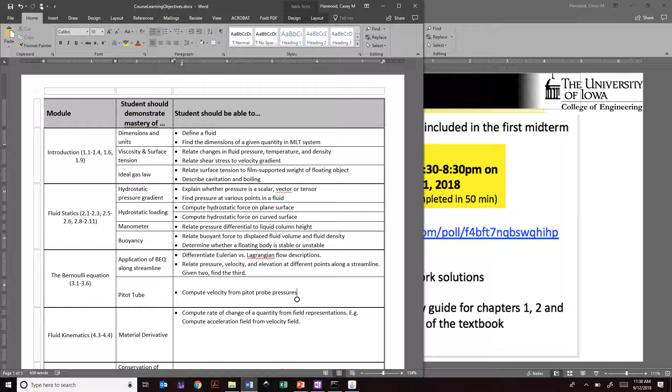Okay. It's going to cover chapters 1, 2, 3. So for study guides, I recommend looking back on Icon and finding this course learning objectives sheet, making sure you're up on all of these tasks for modules 1, 2, and 3. You can do these things. Additionally, after class today, I'll be posting a practice exam. It was the exam I used last year. You guys will have that for the next week.

Sometime next week, Tuesday, Wednesday, or Thursday, I'm going to hold an evening review session. The idea is it's very much student-led in that you guys bring questions that you have about the practice exam, homework problems, etc., and I'll just work those problems on the board for about 2 hours. Okay, so it's going to be Q&A driven. If you guys don't bring questions, I'll pack up and leave early. So that's going to be the format.

The schedule for that hasn't been set precisely because I want it to be what suits the majority. I know we're getting into midterm season here, so I want to avoid conflicts if possible. So I posted it on Icon already. If you go to Icon modules, exam 1 supplement or prep material or something, there's a link to indicate your availability. And sometime tomorrow afternoon, evening, about 24 hours from now, I'll go ahead and request the room so that we have a space to meet.

In terms of materials you can bring with you, shown here, an organized binder with homework solutions, quiz solutions if you have them, which are the same as the homework solutions, right? You can bring a handwritten summary sheet with formulas. This is one sheet, front and back, okay, that has formulas for chapters 1, 2, and 3, and a calculator.

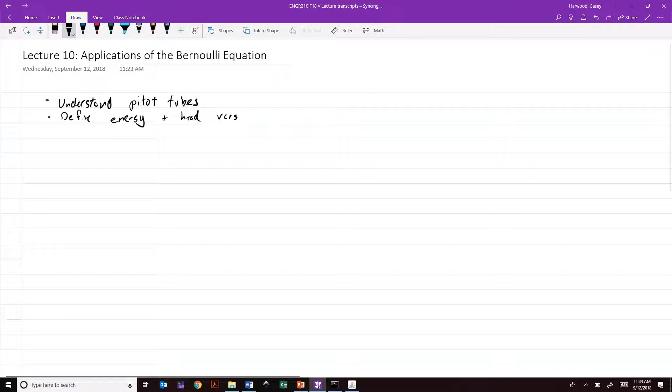All right, so today we're going to be wrapping up our discussion of the Bernoulli equation. The last lecture ran a little bit longer than I expected. We didn't quite get to all of the objectives that I had, so we're going to try to hit those today. So our specific goals for today are: we want to understand the function of a Pitot tube. We want to define the energy and head versions of the Bernoulli equation. And finally, we want to use the continuity equation and the Bernoulli equation together.

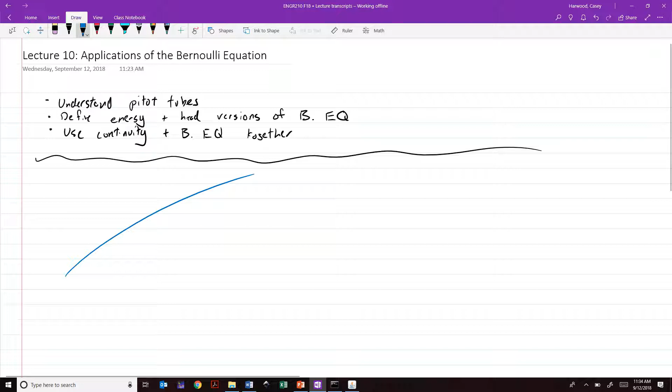So to anchor ourselves and understand where we are right now, right? So far in chapter 3, we've really come up with two equations. Those were F equals ma, manipulated a little bit, but applied in different ways. So we said we've got a series of streamlines, and on each streamline we have a local coordinate system. Let's point these the right direction.

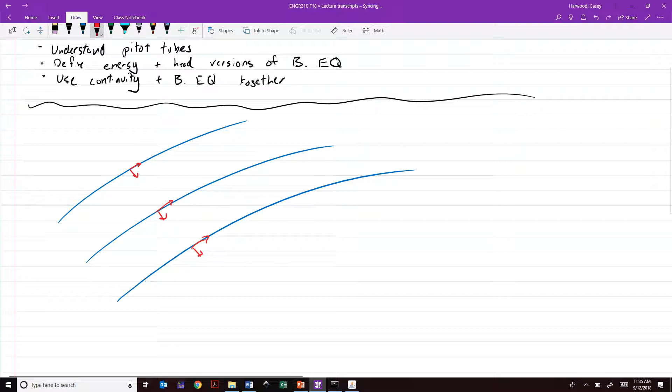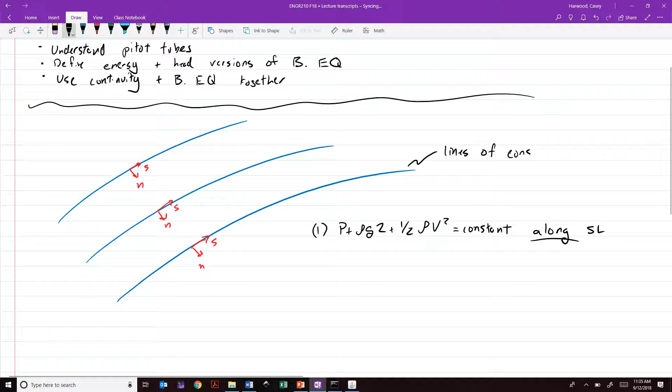And we've derived our two equations. The first is P plus rho g z plus 1/2 rho V squared is equal to a constant along these streamlines. Okay, so each of these blue lines here can be thought of as lines of constant equation 1.

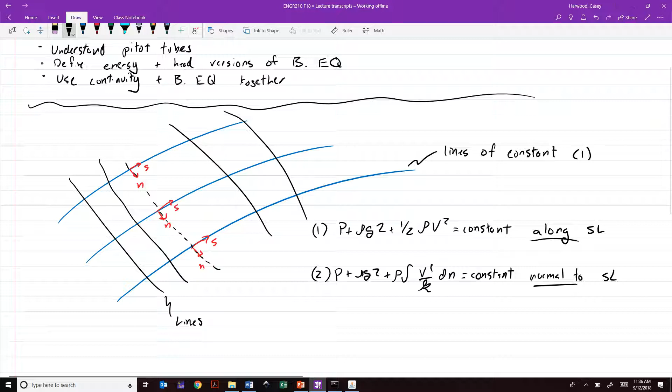Then we had our second equation, which was P plus rho g z plus rho times the integral of V squared over the radius of curvature is constant normal to streamlines. And so this means if we took lines that passed through this normal vector and through each of our streamlines, we could draw sort of a network of lines that looked like this. Okay, and so these would be lines of constant equation 2.

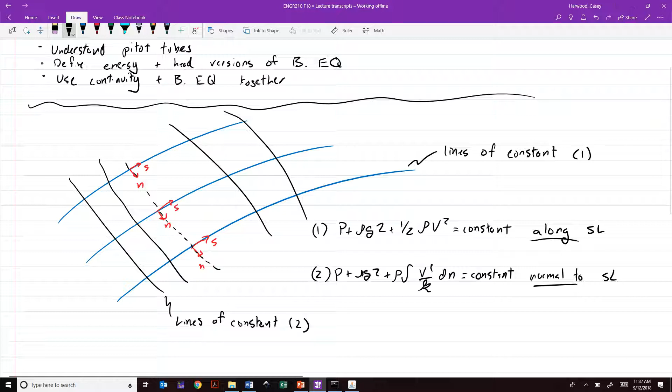So the streamlines and the lines that are perpendicular to them will form this sort of a curvilinear grid, or this sort of net, where at every intersection the two should form a right angle. All right. And so these two equations apply depending on whether we're looking directly across streamlines or along them. But we have to keep in mind what I stated before were sort of our commandments, if you will, of Bernoulli, or the limitations that are inviolable,

which are: both of them apply to steady flow. Both of them require that we're assuming our flow is inviscid, that is, it's not dominated by viscosity. In both cases, we're assuming a constant density, and then the equation has to be applied along a streamline if we're dealing with equation 1, or perpendicular to streamlines if we're dealing with equation 2. So before you apply either of these equations, you have to go through this checklist and make sure that all of those assumptions are at least acceptable. Okay.

Now, the rest of what we're doing today is basically demonstrating through example some of the applications that we haven't really gotten to yet. And the first one is this idea of, it's called a Pitot tube.

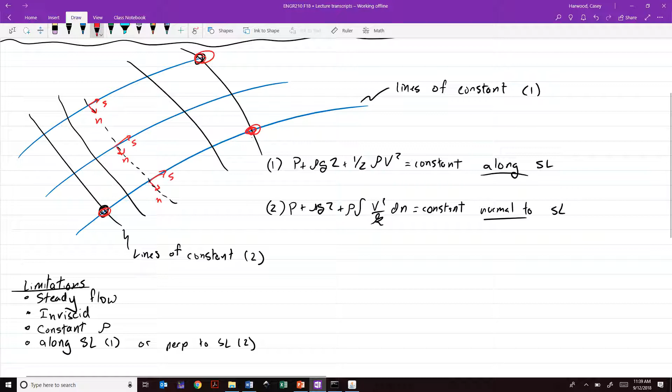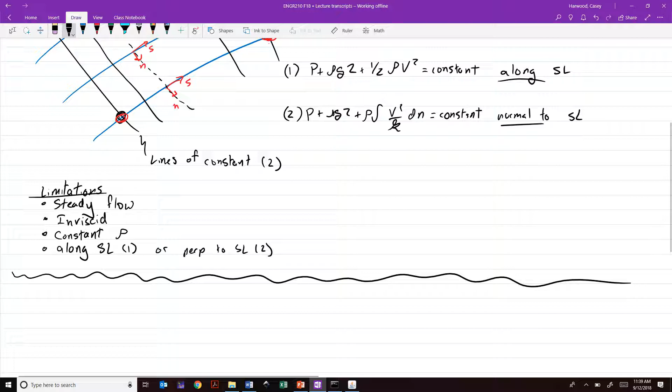Okay. So the Pitot probe, or the Pitot tube, is one of the most widespread instruments that we see out in engineering fields. Any of you ever been stepping onto an airplane, and if you've looked over at the cockpit, you'll see this little thing sticking out of the side of the fuselage that has a right angle, about 2 inches wide. Anyone ever seen one of those? It usually has a sign that says "Do not step." No. All right. Well, keep an eye out for these. These are what are known as Pitot probes, and they're instruments used to measure the velocity of the flow past them, and they do that using the Bernoulli equation.

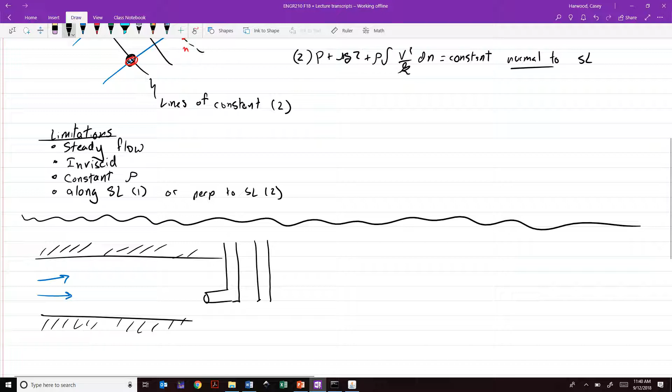So let's consider a case where we have some flow through like a pipe or between two walls where we don't know the velocity and we don't know the pressure of the flow. Okay, so our flow is moving from left to right. We're going to insert two sort of straws or tubes into the flow. The first is going to be at a right angle, and the second one is going to be straight in. And so the flow is going to move past these two tubes, but in one case it's going to hit the end of the tube head on, and in the other, it's going to flow right past the end of the tube.

So our question right now is, if we put our points of interest, say right here, and then right here, let's number these point 0, point 1, and point 2. Okay, using the Bernoulli equation, we should be able to figure out what the pressures are at point 1 and 2 in terms of the pressure at point 0. In other words, at 0 we've got V naught, P naught, and Z naught is the elevation. So using those symbolically, can we write the pressure at point 1 and point 2?

So we'll go ahead and first apply Bernoulli between 0 and 1. This is going to look like P naught plus 1/2 rho V naught squared plus rho G Z naught is equal to P1 plus 1/2 rho V1 squared plus rho G Z1.

All right, initial simplifications we can make. Sort of by inspection, we can see that 0, 1, and 2 are all at the same elevation. That is, Z is the same for all of them. So we could subtract the rho G Z terms from both sides to cancel those out. The second thing is that this tube that's head on to the flow, this right angle tube, is what's known as a stagnation tube. And the idea there is that the flow hits it and it stops. So at point 1, we would say that the velocity is 0.

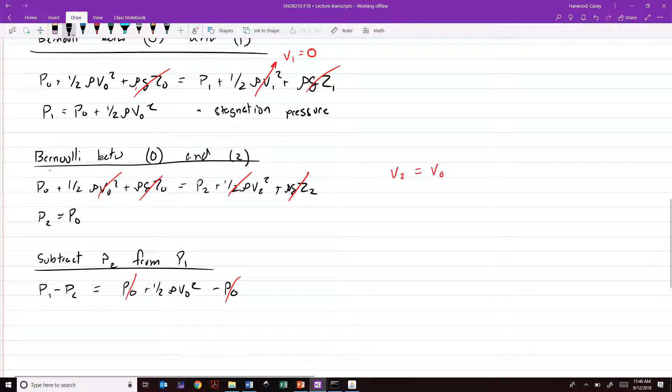we would get P1 minus P2 equals P naught plus 1/2 rho V naught squared minus P naught. So we get that cancellation of P naughts, and now we have a term that only involves the density and the velocity. If we know the density of the fluid, let's say it's fresh water, 1,000 kilograms per meter cubed, or air at standard atmospheric pressure and temperature, 1.23 kilograms per meter cubed, we generally are able to get a pretty good fix on what the density is.

Then we can say that the velocity V naught is equal to the square root of 2 over rho times P1 minus P2.

And the nice thing is there are lots of measurement devices that allow us to measure the relative pressure between 2 points. We talked about one of them in Chapter 2, or well, Professors Mattia and Eichinger did. What about the U-tube manometer? It's a way of measuring the difference in pressure between 2 points based on the height difference in a column of fluid. There are also differential pressure gauges, which will give you a digital readout.

Whatever your measurement device is, if you are able to measure this quantity and you can figure out what your density is, then you can measure the velocity, which is really useful. And so these are typically used as backup devices on aircraft to measure airspeed if GPS drops out or something. The idea there being, right, density is going to change with elevation, but there are pretty good tables that are able to tell us what the density is based on the elevation of an aircraft.

So this is the principle of operation of a Pitot probe. And I want you to remember this, understand it. Right? Come to love the Pitot probe because it's something that's going to show up throughout the course. Any questions about this? All right, let's move on to alternate forms of the Bernoulli equation.

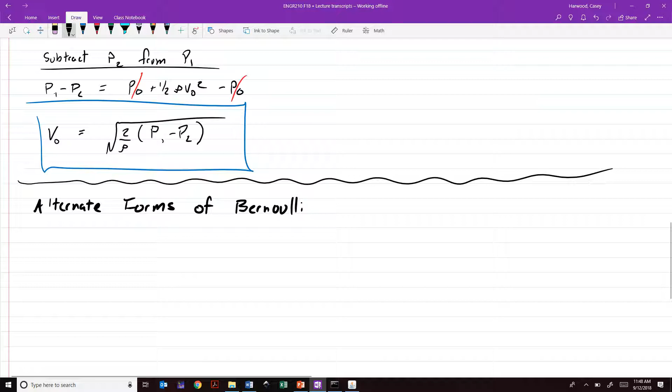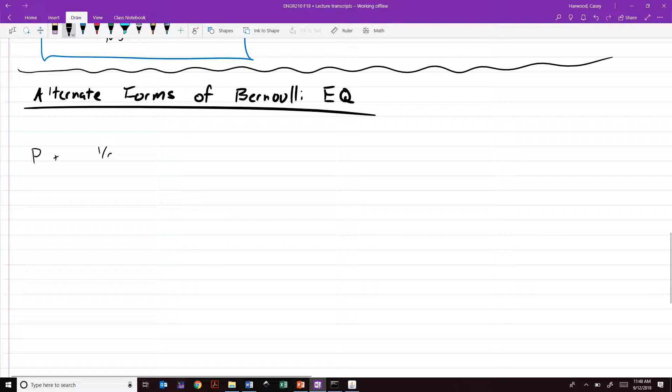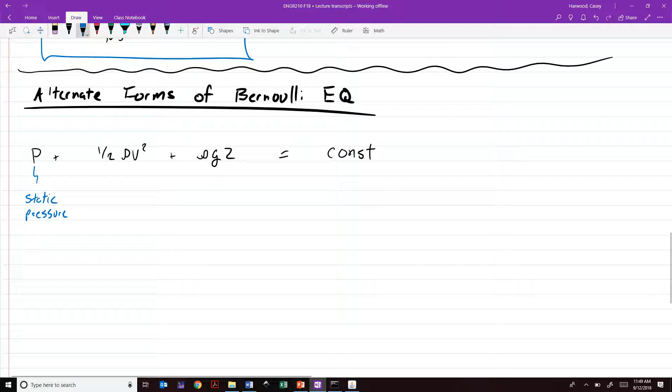So first, I'm going to go ahead and write out the Bernoulli equation that we've already seen. Right? P plus 1/2 rho v squared plus rho g z is equal to a constant. So each of these terms has a special name. And these are things that showed up in the text if you read. But the first term here, P, is what's known as the static pressure. This is what we measured with that second of our tubes in the previous example.

The second term is what's known as the dynamic pressure. And the third term is the hydrostatic pressure. The idea is if you sum these up, you get what's called the total pressure, which should remain constant. Okay, and we saw in the last problem also that if we took these two terms together, we got what was called the stagnation pressure.

Okay, so the thing is that pressure, right? If we were to say pressure is force per unit area, it can also be interpreted as the energy per unit volume. So the static pressure is sort of like the pressure potential energy, or 1/2 rho v squared looks sort of like a kinetic energy term. If we were to multiply it by volume, we would get 1/2 mv squared, which is familiar kinetic energy.

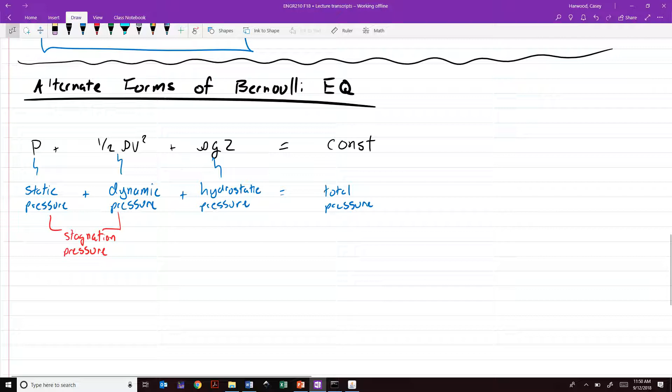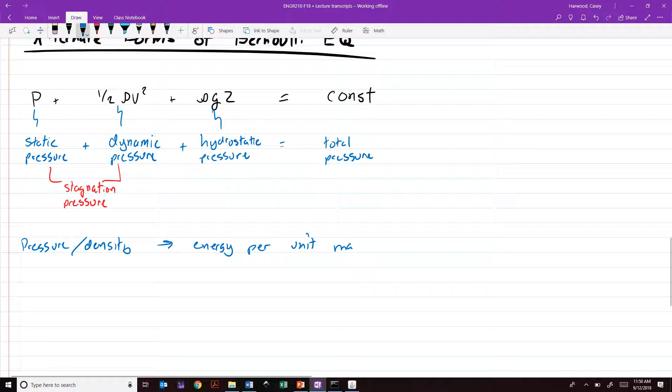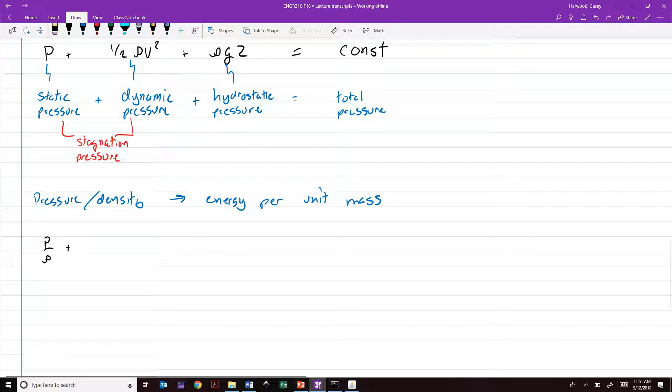And so if we divide this through by rho, the density, we could say that pressure over density can be interpreted as the amount of energy per unit mass. And so if we go through and we divide everything in here by rho, we'll end up with an alternate form. Looks like this: P over rho plus 1/2 v squared plus gz is equal to, again, a constant. It's the same equation, it's just been divided through by a constant, but this is what we would call the energy version of the Bernoulli equation.

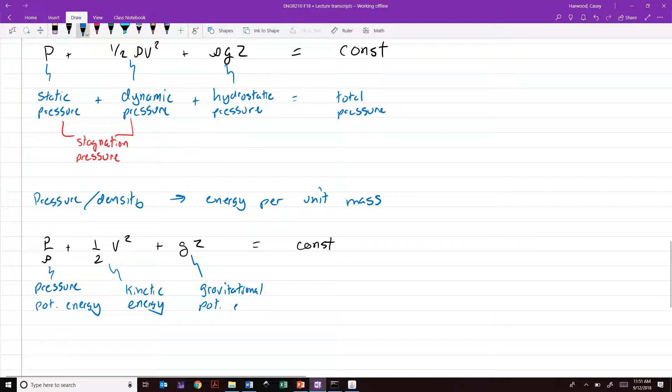And so we have, this first term is the pressure potential energy. The second one is the kinetic energy. And this third one is the gravitational potential energy. Oops. All per unit mass. Okay, so we'll say per unit mass. And if we add these together, we can say then that we have constant total energy.

So this is a way of saying, look, the Bernoulli equation is really a statement of the conservation of energy. And under the assumptions we made, no viscosity, that's sort of the same as saying it's a reversible process or a conservative process. There's no friction. That means that the total energy is conserved in a fluid.

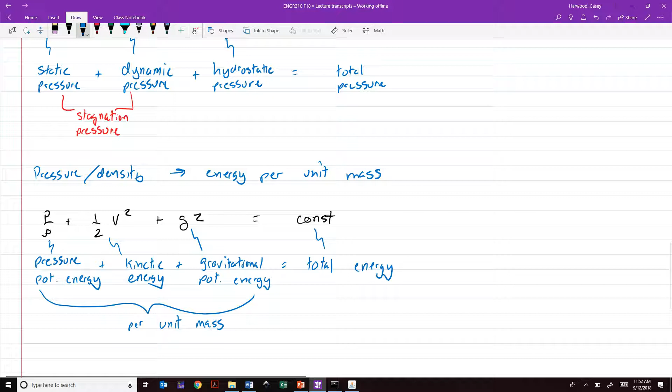Finally, if we were to divide through by g, this second equation, we can see from the second term here that what we're going to be left with is something that has dimensions of length. So if we say P over rho g plus 1/2 v squared over g plus z now is equal to constant, this is what we call the head equation.

And remember, when you discussed manometry, the manometer equation with Prof. Mantilla, you talked about how you can describe the elevation difference of a column of fluid as the head. The idea here is we just give these terms different names. This first one is the pressure head. That is, this is how high the pressure would drive a column of fluid in a piezometric tube.

The second one is what we call the velocity head. And this third one is the elevation head. And these together sum up to the total head.

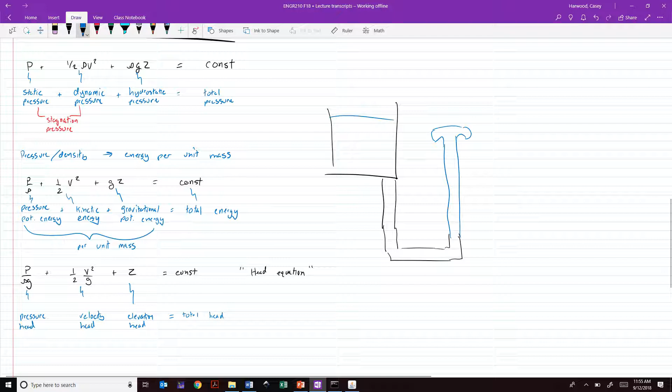And then spraying upward. So you had now a free jet of water coming out the top. So intuitively we could probably recognize that the jet of water is going to reach the same height of the water level in the tank. But to show that mathematically, it would be most convenient, probably, just to avoid extra terms, to use the head equation, right?

Where we could say, if this is the head of our initial tank of water, we could pick points here. If we wanted to, we could pick a point here, and a point here, and we could apply the Bernoulli equation. But if we apply the head equation, we wouldn't have to deal with that. We could apply the head equation between that first and that third red dot there.

We know that we can set the constant of the head equation at point 0, and if we had this one, point 2, we can apply it between point 0 and 2 directly. And we could say, well, the pressure is going to be the same, the velocity in both cases is going to be 0, and so you just solve for z at that point.

So this is something that causes some confusion because students treat them as 3 different equations. I just want you to understand that they're the same equation, just written out in different forms and given a different name. Okay, so sort of along the same lines.

Buster? Yeah. This equation for head, is this what we were supposed to use for the third homework problem that we were doing today? Well, again, you can use any of them, right? There are no situations where you have to use the head equation and you can't solve it using Bernoulli. The only thing it's really going to do is allow you to save some pencil lead, right?

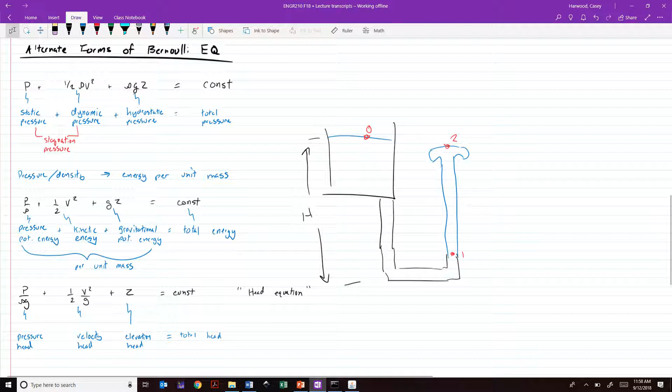Shouldn't the velocity be 0 at the stagnation point? The velocity will be 0 at the stagnation point. So why are we including the dynamic pressure? Because if we go up to our previous example where we had 0 and 1, and the end of our stagnation tube, we said that P1 is equal to the sum of our static pressure at 0 plus a dynamic pressure. So the stagnation pressure is what happens if you bring the velocity to 0, then all of that kinetic energy gets lumped in with the potential energy. Okay.

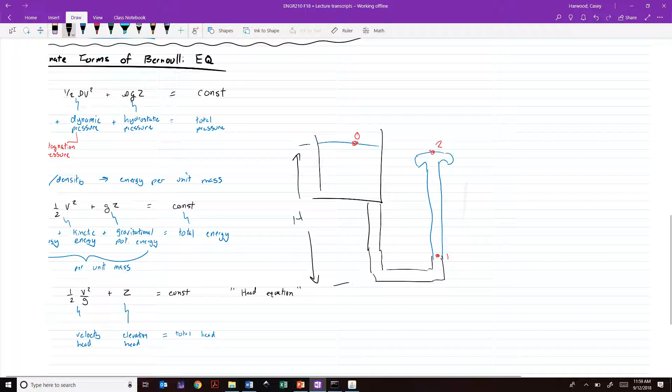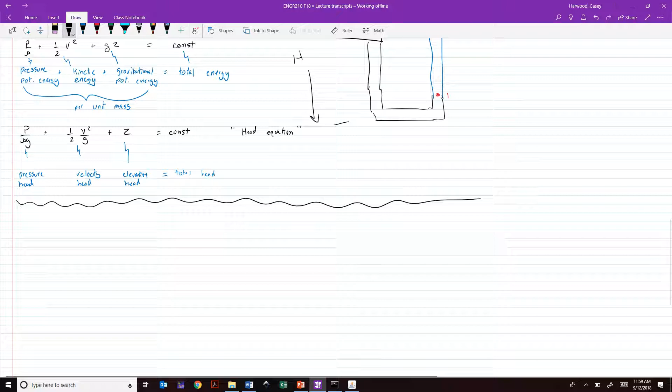So I want to define these things called hydraulic and energy grade lines very briefly. These are more commonly used in civil engineering than in mechanical engineering, but they're useful to know. So.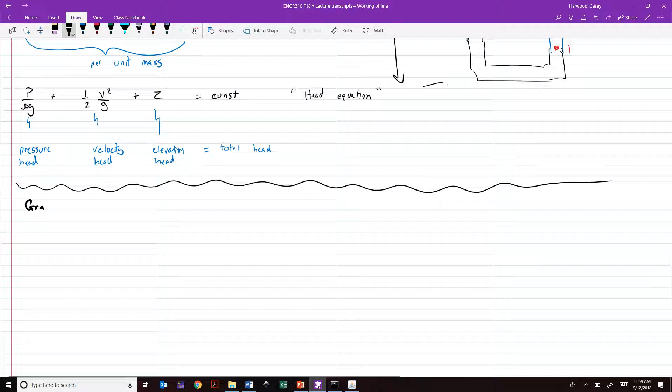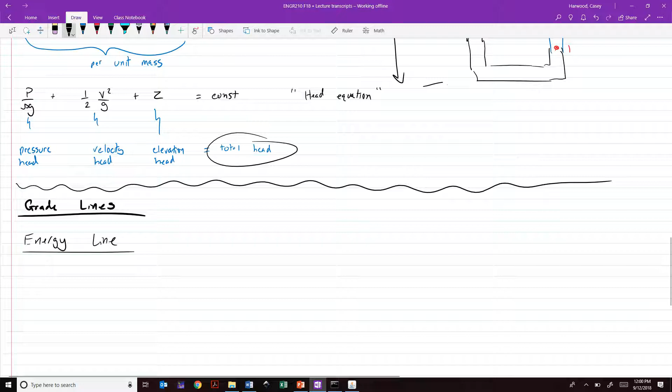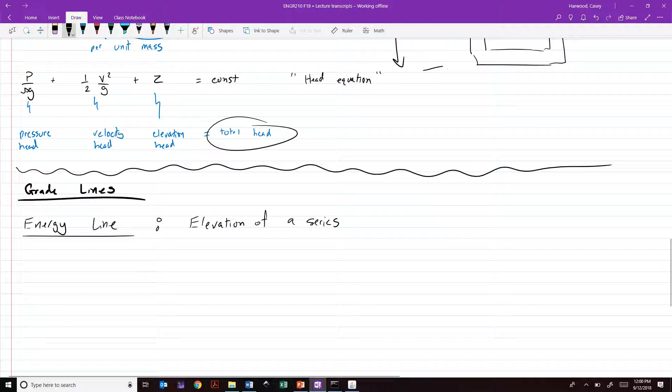So an energy line can be thought of as, if we're looking at our head equation, basically plotting out the total head of a system. So this can be thought of as the elevation of a series of stagnation tubes in a flow. And this is probably a confusing statement. I'll clarify it in a moment.

And the second one, the hydraulic grade line, is the elevation of a series of static pressure tubes in a flow. So in other words, I'm going to scroll back up here for a second. If we were to take this situation again, let me go ahead and copy this and bring it down so that we aren't scrolling a ton. Paste. There we go. Okay, so tube 1, a stagnation tube.

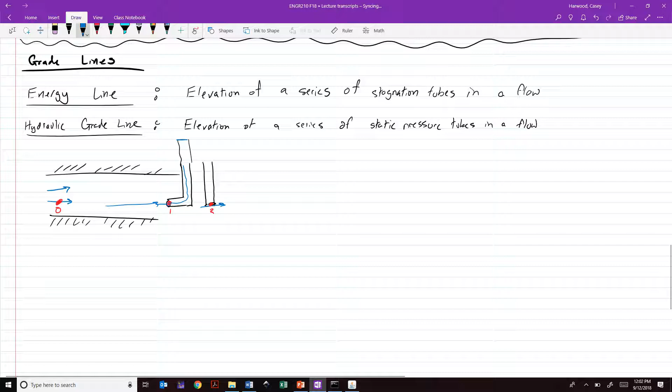If instead of having a pressure probe at the end of it, this were to be full of whatever fluid, as if it were like a straw. We took a straw, bent it 90 degrees, stuck it into a flow. The idea is that the fluid that is flowing past is going to occupy the tube and fill it up to some height. Now, the height of that fluid in the tube is going to be the pressure head plus the velocity head plus the elevation head. And so that's going to be indicative of the total head in the system, and so that is going to be the energy line at this point in a system.

Whereas the hydraulic grade line would be if we were to allow the same thing to occur here. If this second tube were to be open to the flow, it's going to fill up to a level that is lower. So let me quickly draw a little schematic here. Let me make this bolder. Okay, so let's say we've got a tank, a fluid that empties into a really large diameter pipe that then narrows into a smaller diameter pipe before ending in a jet that aims upward, with water spraying out of that jet. So if it's full to a level like this initially with water flowing through the pipe and exiting through this jet. There's a much better version of this drawing in the book, but this should suffice for now.

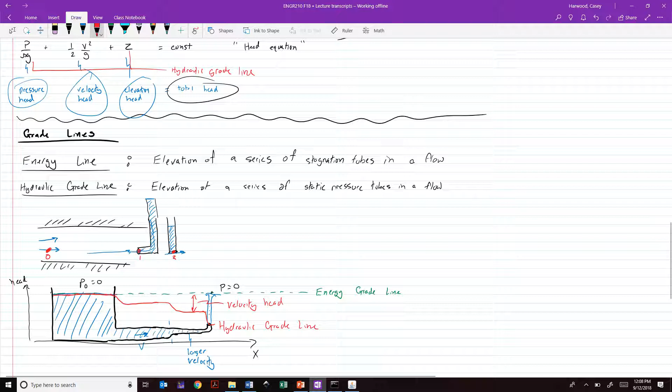I don't really have time to spend doing a lot more with grade lines, but I just want to introduce you to them. Please check out the section of the book that summarizes them for a little bit more clarity. What I want to do with the last 10, 12 minutes is at least get started on an example that involves combining the Bernoulli equation with what we call the continuity equation.

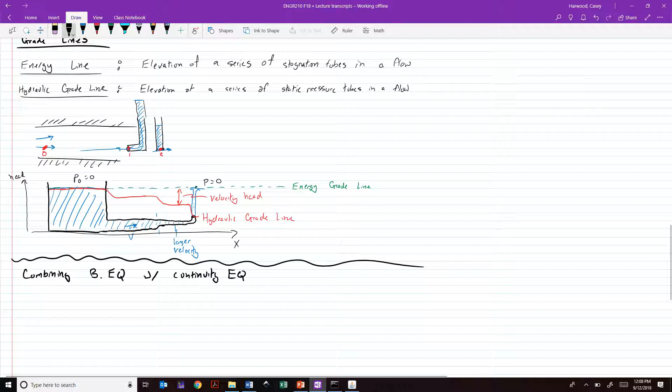So we're going to formalize this a little bit in the next chapter, this idea of what we call conservation of mass. But at this point, we should be able to intuitively understand that, just as in the previous example, if we have a pipe that changes diameter, basically the flow in through the left and the flow out through the right is going to contain the same amount of mass per unit time.

The mass flow rate in has to equal the mass flow rate out, which is the equivalent of saying, if we've got point 1 and point 2, that rho 1 times V1 times the cross-sectional area of the pipe at 1 is equal to rho 2 times V2 times A2. And if we're dealing with the same fluid and the assumptions of the Bernoulli equation hold, that is that rho is constant, then we could cancel that out from both sides. And we could say that basically the volumetric flow rate in is equal to the volumetric flow rate out.

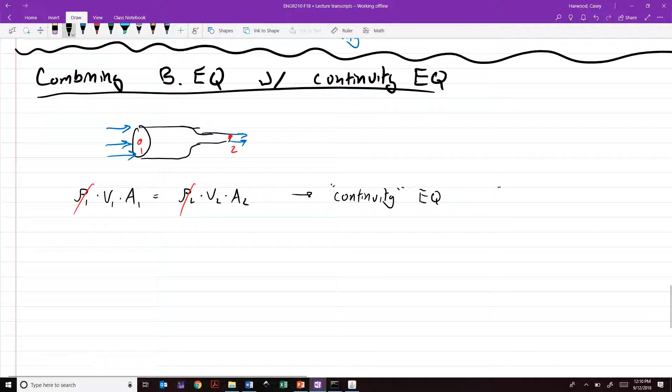When this becomes useful is in cases where, one moment, I gotta copy, I'm gonna black this out for just a second. Forgot to copy this figure over earlier. Bear with me for one moment while I grab it out of my notes.

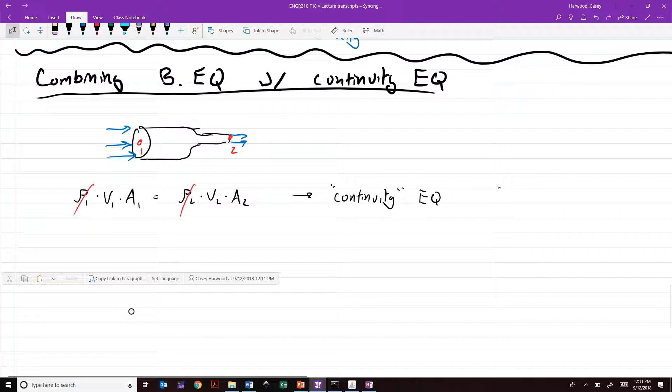Okay, so here's the example problem that this new equation, the continuity equation, is going to help us solve. This is one that we might not quite finish, but if we don't, I'll post the completed solution up on Icon.

So what we would be looking to find in a problem like this is, let's say we've got one fluid on top of another fluid in a tank that has some pressure greater than atmosphere. And we've got points that we'll number. Okay, 1, 2, we're going to ignore that point. We'll call this point 3. We'll call this point 4.

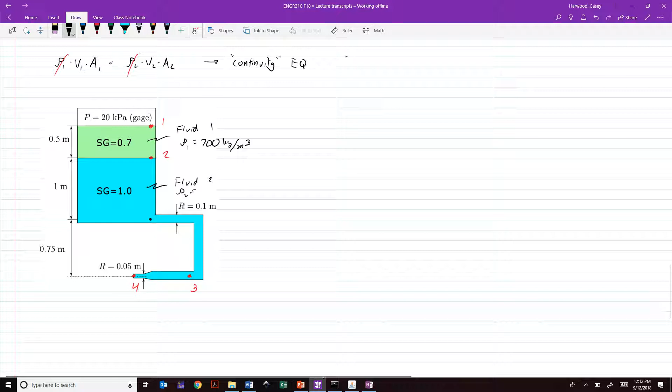So there are a couple of new things in this. First is we've got dissimilar fluids. We've got something with specific gravity of 0.7, which is the equivalent of saying that in fluid 1 here, rho 1 is equal to 700 kilograms per meter cubed, and fluid 2, rho 2 is equal to 1,000 kilograms per meter cubed. So that's approximately something like motor oil sitting on top of water.

And then the second thing is, as we just had in our little informal derivation previously, we've got a change in the diameter of the pipe. So rather than going rigorously through a solution right now, let's just step through it in broad strokes so that we can understand, from beginning to end, what we would be doing to solve this problem if someone told us to find the pressure at point 3.

Okay, so we might say this is a problem for Bernoulli. The other assumption we're going to make here is that this tank is very large, which means that we can assume that all of the velocities in this tank are approximately 0.

So step 1 might be, if we said our solution process for this problem would be, all right, first we might say apply hydrostatics between point 1 and 2. Okay. In other words, we would say, right, we know pressure at point 1. It's specified as pressure being 20 kilopascals, 20,000 pascals. And we could say that the pressure 2 then is equal to the pressure at 1 plus rho 1 times g times that 0.5 meters that specifies the elevation difference. Okay, so we can calculate the pressure at 2.

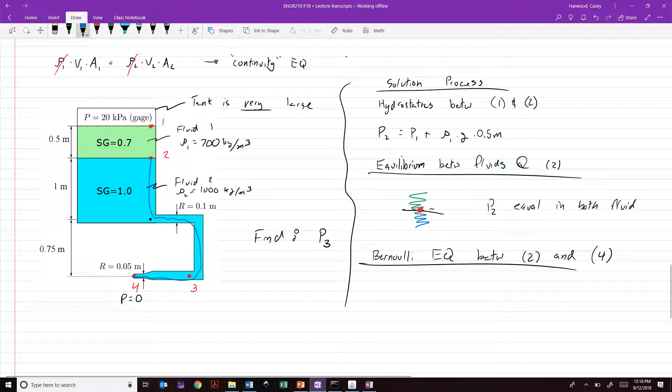Why wouldn't this work at point 3? Why can't we just do Bernoulli equation between point 2 and point 3? We don't know the velocity and we don't know the pressure, so we have two unknowns. So what we're doing here is we're finding the velocity at point 4, and then if we know the velocity at point 4 and the diameter of the pipe at point 4, we can figure out how much volume per unit time is flowing out through point 4, and the velocity at point 3 is not going to come from the Bernoulli equation, but instead from this equation right here.

So we would use this process to find V4, and we would apply the continuity equation then between point 4 and point 3, which would allow us to say that V4, which is known from the previous step, times the cross-sectional area of the pipe at 4 is equal to the velocity at 3 times the cross-sectional area of the pipe at 3. In other words, V3 is given by V4 times A4 over A3, or the ratio of the cross-sectional areas of the pipe.

Okay? So now we know V3, and now we can apply the Bernoulli equation. We have two choices. We could go between either point 4 and point 3, or we could do the Bernoulli equation between points 2 and 3, because the only unknown at point 3 now is the pressure. And so we can use the Bernoulli equation from either side to solve for the pressure, a single unknown. So I'll post this detailed solution on Icon.